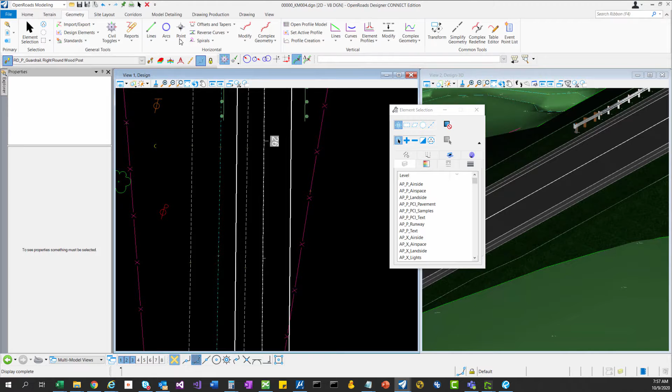Provide some insight, maybe entice or intrigue you, get you excited for some things to come. I'm going to use guardrail as an example here, but this can be broadened to everything else in terms of pay items. I'm just going to quickly draw one in so you can see the general workflow. I'm going to draw a guardrail in.

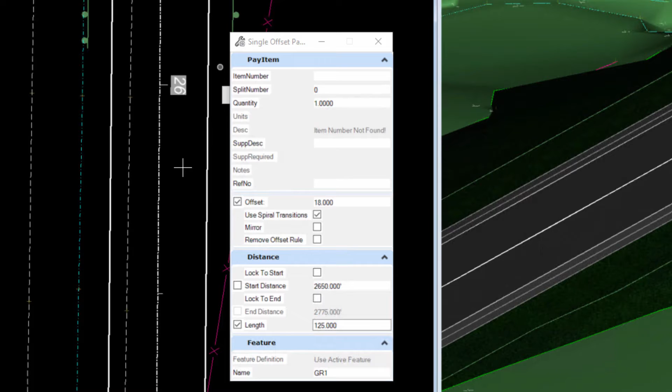I'm just going to draw one by offsetting from the center line. What I want to point out here is right inside this placement tool, when I have this feature definition set, guardrail right, you'll see there's pay item info here.

So right inside the tool itself, as you're placing it, you can come in here and start defining stuff. Let me key in the item number. Now I can do split number. Quantity, right now it's just a key-in, but we can pull that quantity - I'll show that later. For now, I'm just going to come over and place it.

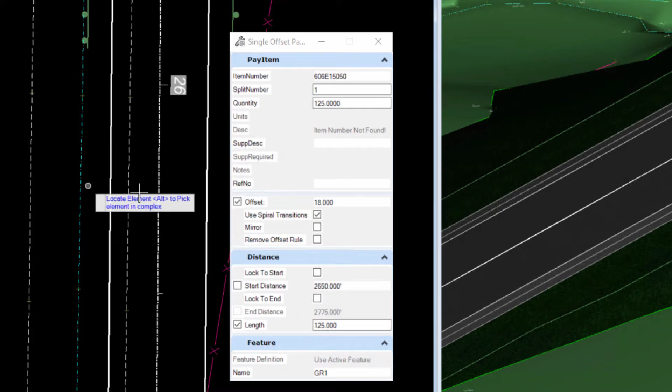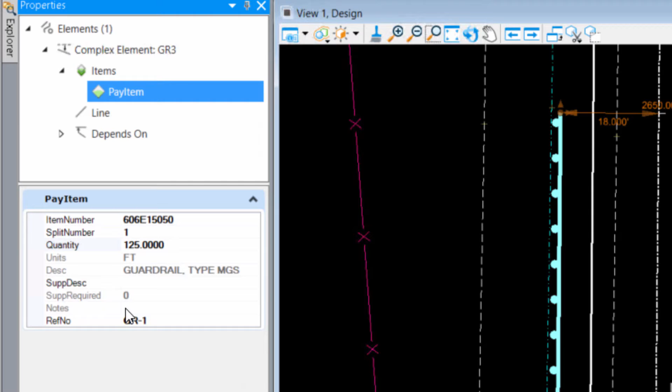Let's take a look at it. Take a look at the items, the pay item data. Oh, it's right there, filled out. And you notice it's pulled in stuff from our item master - it pulled in the description.

The way that's working is it's actually pulling in item data specific to that given work set. So right here, if I look at my work set in my 990 work set standards, there's an item master Excel file. It's kind of cool how we can dynamically pull that data in, and then we can start using that data to extract info and generate summary sheets and whatnot.

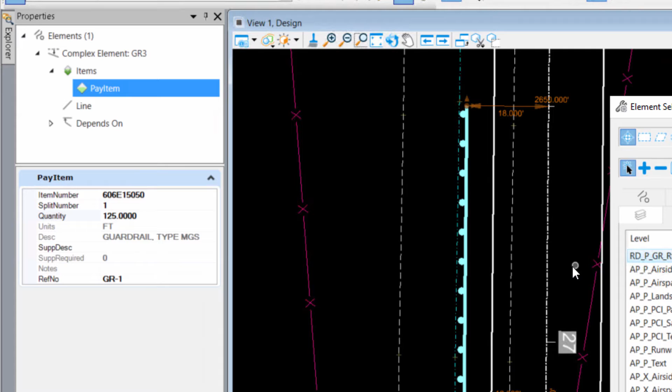You notice it's not in 3D - that's because this needs a profile. So I'm going to add in a profile here so we can get it seen in 3D, and I'm just going to speed the video up.

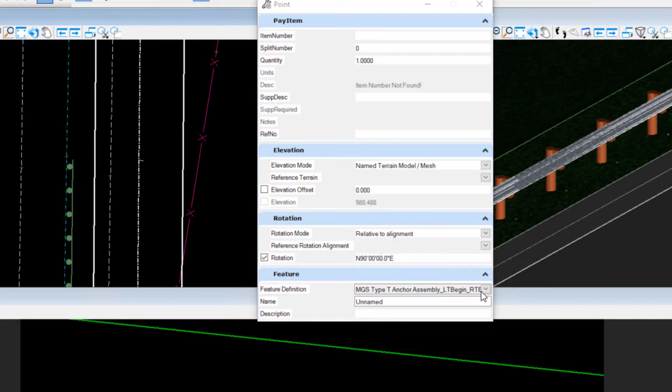After that, I'm going to turn my focus to place a point feature. So things like anchor assemblies, we could do the same thing. Here I'm going to place it. You notice I didn't fill out the pay item data here.

So after I place it, I can just go select it and take a look at those properties. You can see there's the pay item data, and I can easily come in here and fill out the item number, split number, and you can see that it's going to read that item master data and fill out some of those properties for me.

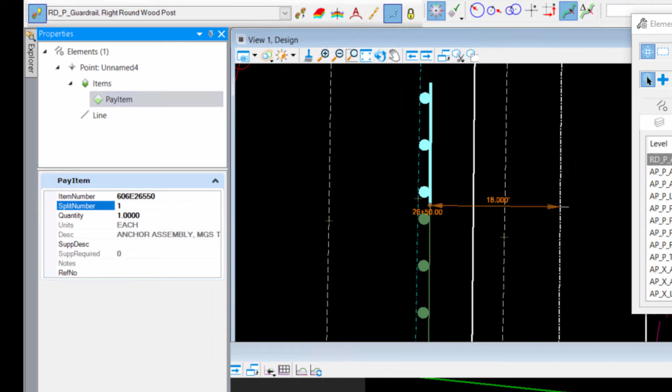So now, what if we want to inject more of that asset inventory data? Let's take a look at that. We can come up here and maybe we'll just open up Asset Manager. I'm still setting this up.

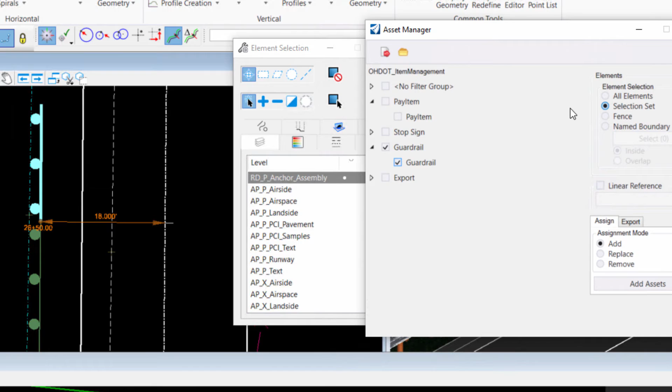You see that pay item that's already been added, but maybe I want to do guardrail - assign that guardrail asset data to these things. I could do that by selection set and just select what I want, but we can do it more in bulk. We can actually set up the criteria of what features should get the guardrail asset data assigned to it.

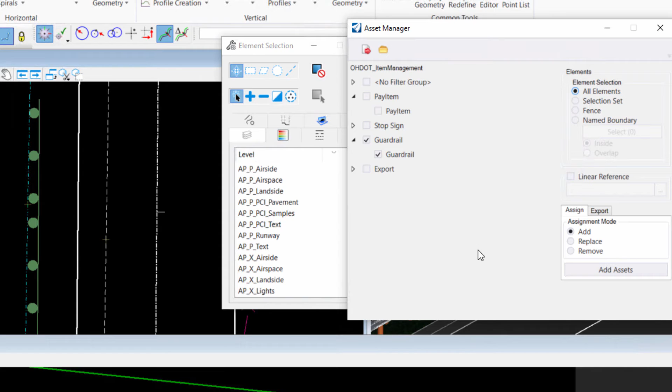I could just go all elements, and when I hit this, it's going to go through my model and find all the items that meet my predefined criteria. So I can just hit add assets. Now it's going to take a little bit of time - it's searching through the entire model and applying that stuff. It says it added to 15 elements.

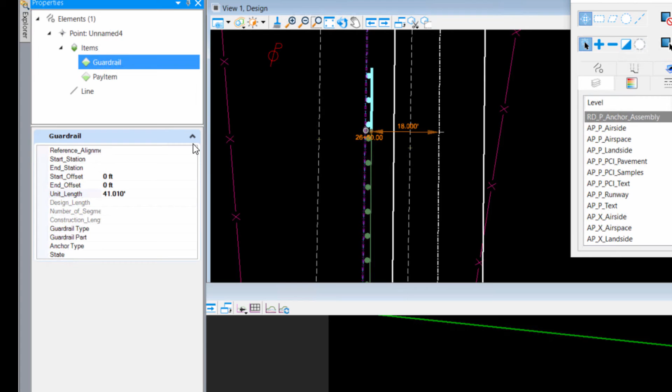So if I come take a look here at my items, I now have a guardrail. And we could do things like get station and offsets, which I should have done through here. So I can just say, I want to add a linear reference to this alignment. Let me do that again and just replace all the current ones in there.

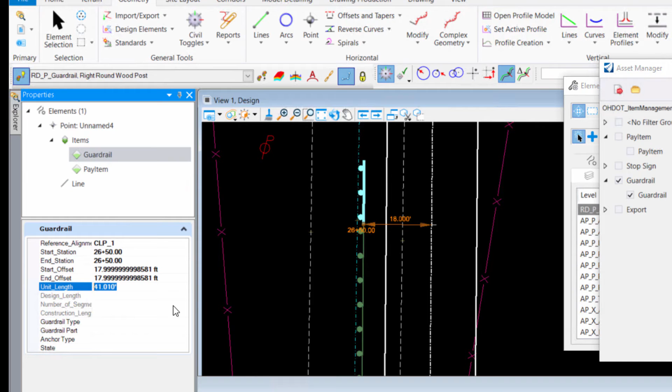Now you can see that data populate in here - station and offset. Now, the length doesn't really matter for something like that, but if I click on my guardrail run, you can see if I put in the right unit length here as a panel length, it calculated that - it grabbed that design length.

So I mentioned earlier we can pull quantity straight from the element - here's where I'm actually doing that. I'm pulling that directly from the element, so if I were to change that length, this value would change. As well as you could do things like, how many segments is that? If my unit length is 12.5, how many segments of guardrail panels will that be?

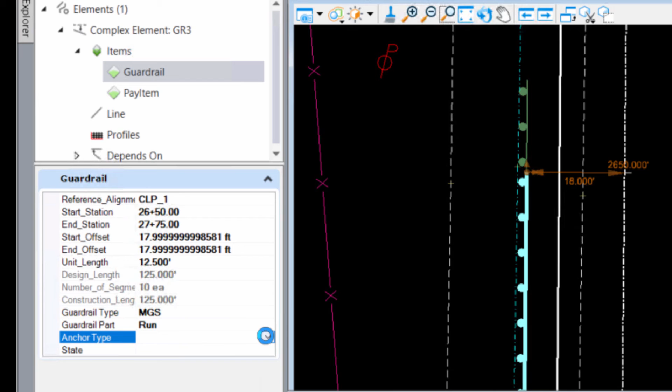We can even go as far as having drop-downs, like type - is it an anchor or is it a guardrail run? If it is an anchor, what anchor is it? This is still not fully set up all the way, but you can choose that type. What state is it - existing, to be removed, proposed, constructed not inspected, constructed inspected?

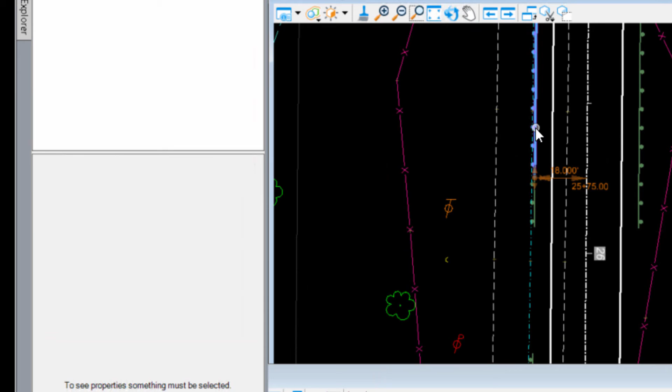So there's a lot of things we can do here, but you'll see that it was very easy to bulk assign that. If I come and look at that one, this one has it on here now too - it also has pay item on those, so I put those in earlier.

And then we can also use this Asset Manager and just export to shapefile - we can get all that asset data right in an easily GIS format. But what about the designers? I got all this data - I need to extract it so I can quantify it and put it into tables and whatnot. So wouldn't it be cool if we could just say, give me all my items in this file.

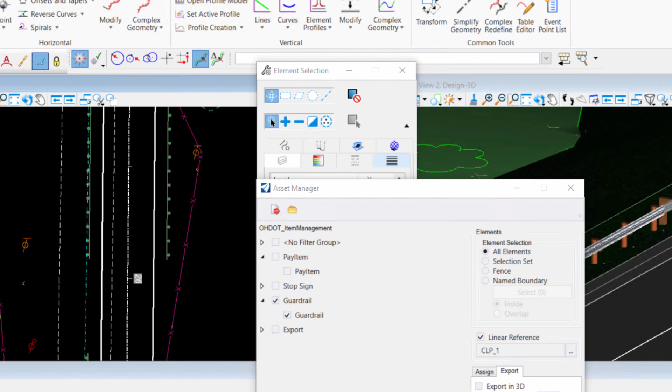So we can use reports, or we can just aggregate all that data to generate tables. I can come in here and preview my results - it's going to pull out all those items, the description, quantities, what split if you filled out that data. So here's all this data, and in turn we can take this and pull that data into our general summary.